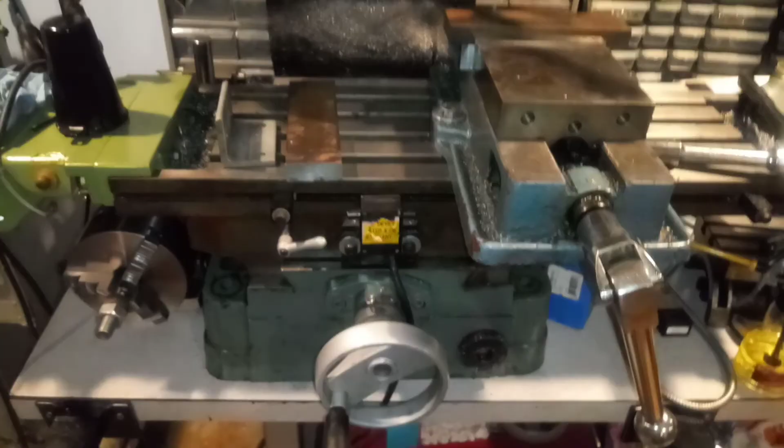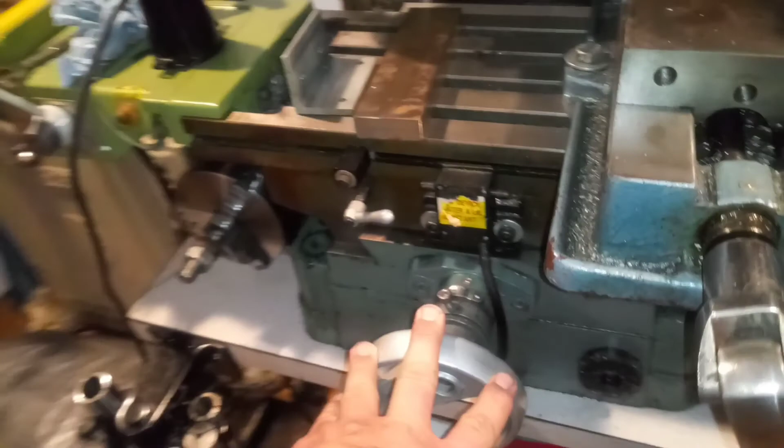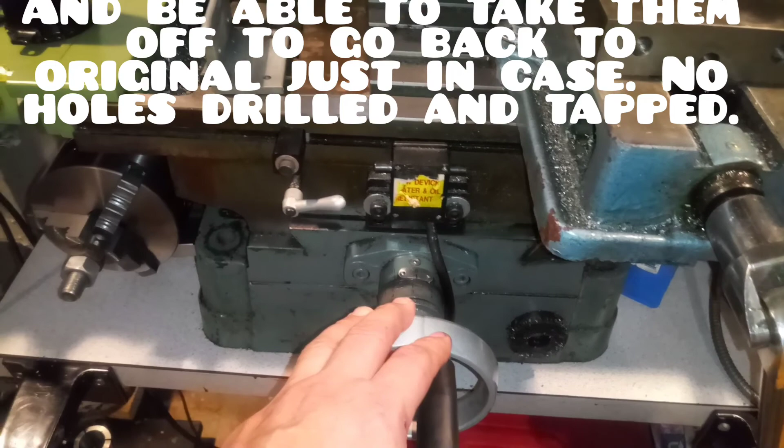So I made an executive decision, and I didn't do it lightly. I am going to put CNC motors or stepper motors on my manual mill. Now, I'm also going to do it so I can keep it manual. So the stepper motors will drive it when I want to use them, and if I don't, I can still use the mill as is.

It's possible, I've seen other people do it. And I'm not looking so much for an actual super high precision CNC machine. What I'm looking for is automation.

Again, I know in one of my other videos I was talking about my up-and-coming CNC mill project, and that will be a bona fide high precision, hopefully 4-axis CNC milling machine.

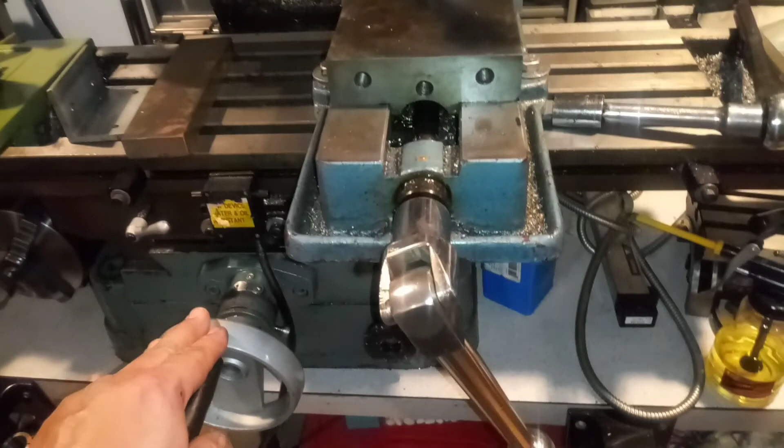But the steppers for this are basically just going to be for facing and, let's say, semi-precision stuff. Like if I want to put holes in a plate, rather than use my DRO, because what I think I might actually do is move the DRO I have over to my lathe, because I'd like to have a DRO on my manual lathe. I don't have one right now, and after pricing them out I realized how ridiculously expensive they are. So anyway, stay tuned.

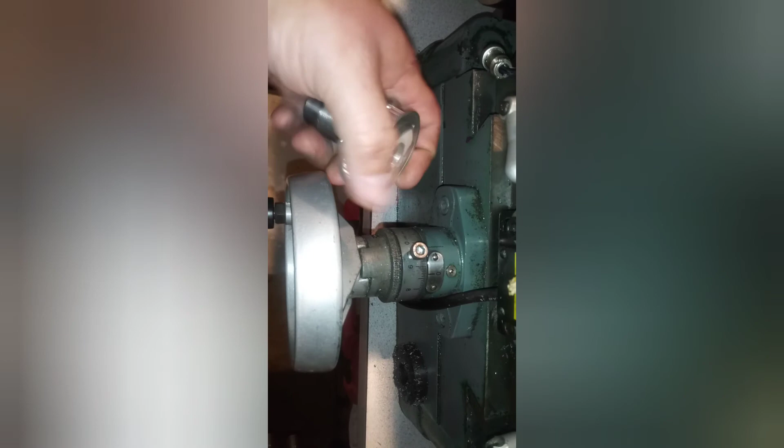So the plan at the moment is going to be replace this part right here. As you could tell, this and this are separate, and this are separate. This handle over here is off of this side, I'm guessing. I mean, this is how I got this machine.

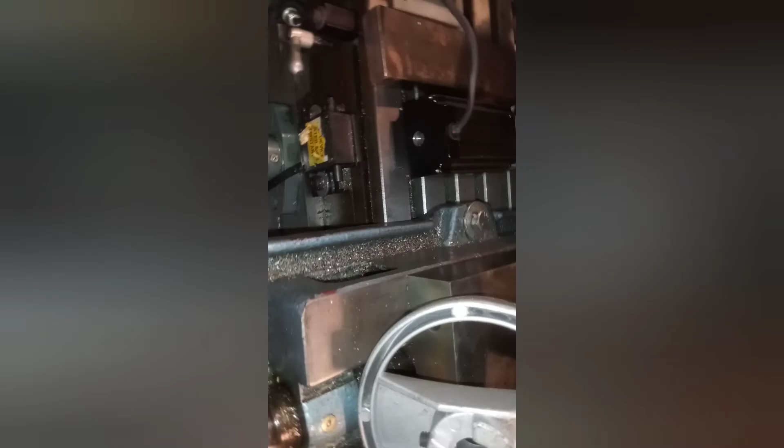When you put this on, so what I'm gonna do is ignore this piece here, this is another one of my failed projects. What I'm gonna do is make this shape here into the back of a pulley, so I can have the stepper motor over here or over here, wherever, and it'll be belt driven.

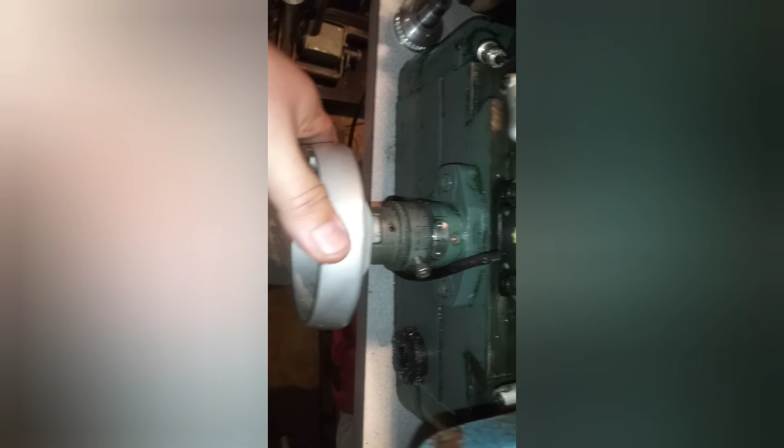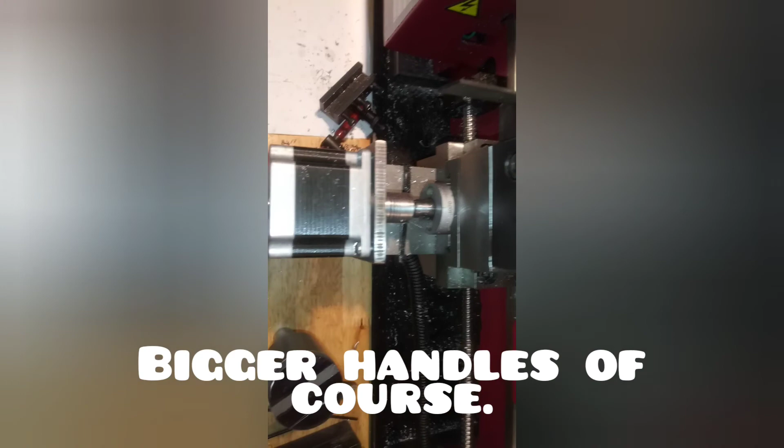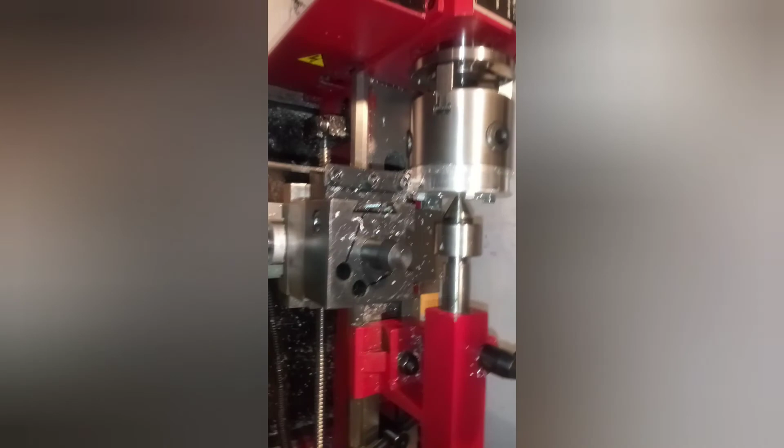Like I said, I don't know if I want to do direct drive. I could use the double-ended stepper motor like I have on my lathe. Hang on, I'll show you. Basically, this is what I got on my lathe. It enables you to use it as a manual machine as well. I have it on both X and Z axes, so I don't have to have the computer attached if I just want to throw something in real quick and turn it.

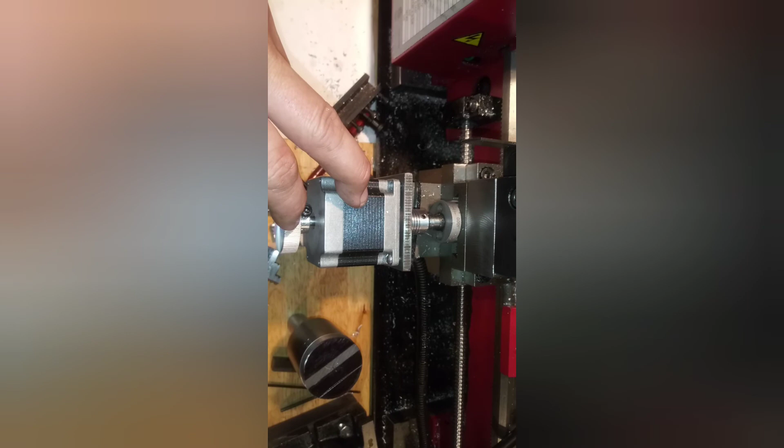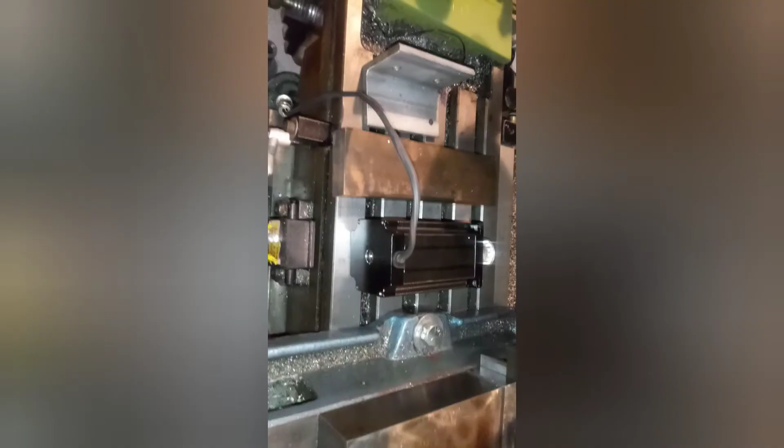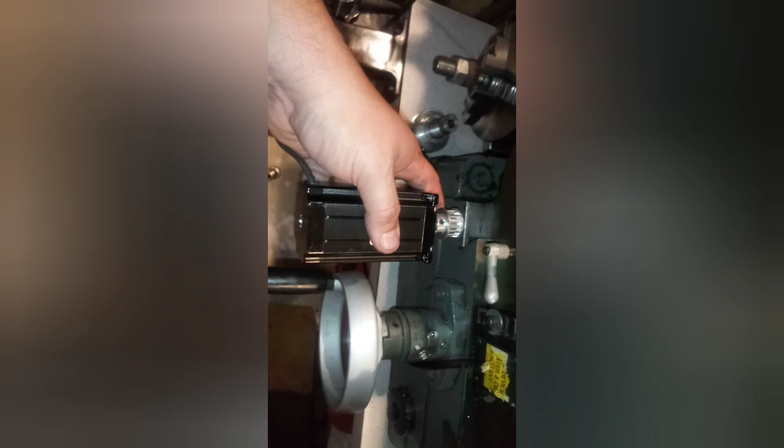So I could go direct drive, but my concern is the stick out of the motor. This is a NEMA 23, it has way more than enough torque for this lathe. But I don't know if this would be big enough for my mill. Probably looking at something like this. This is a 425 ounce of torque NEMA 23 stepper.

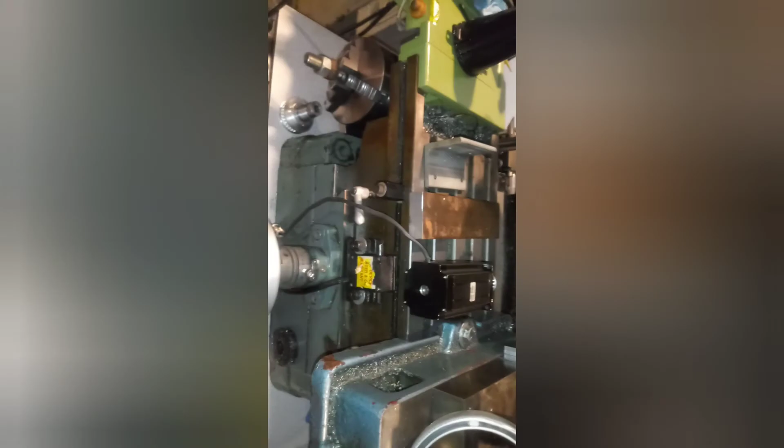Now this does not have the double output, so I don't have any that are this size, so I would have to buy 2 new steppers. But my concern is if I mount this, here, this is sticking out pretty far. I mean, I'll essentially be out here making my adjustments, and over here be the same thing.

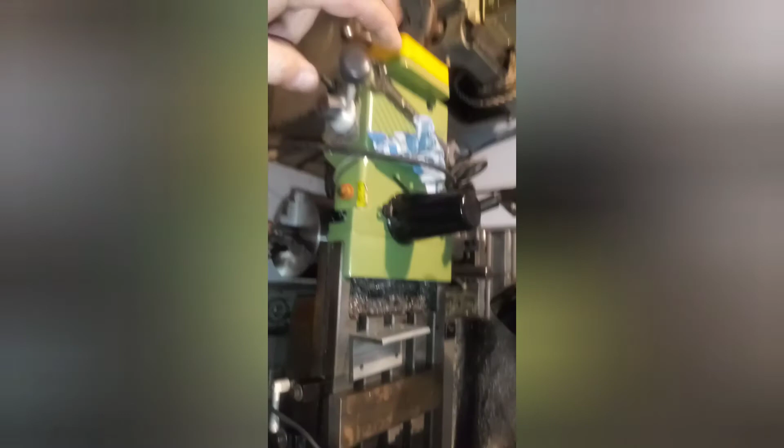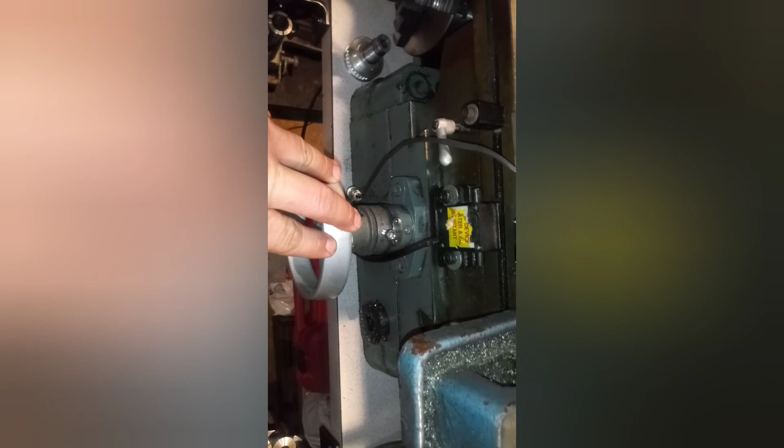Not that I do it that often anyway, because I'm usually using the power feed. But that's why I think I'm going to do belt drive instead. It's not going to be as accurate, but like I said, I'm not going for super accurate. I mean, I want it as accurate as possible, don't get me wrong, I mean, of course. But I might have to sacrifice a little accuracy for feasibility.

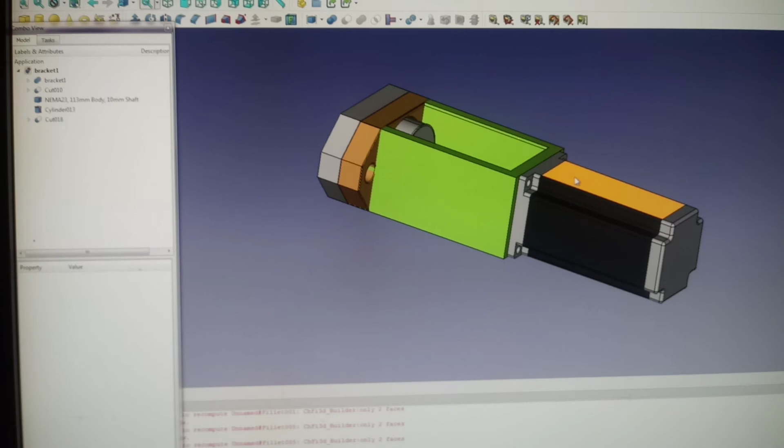Alright, let me show you what I got. This is the mount that I'm considering making. I'm still in the midst of modifying and, you know, fine-tuning, but this is the mount.

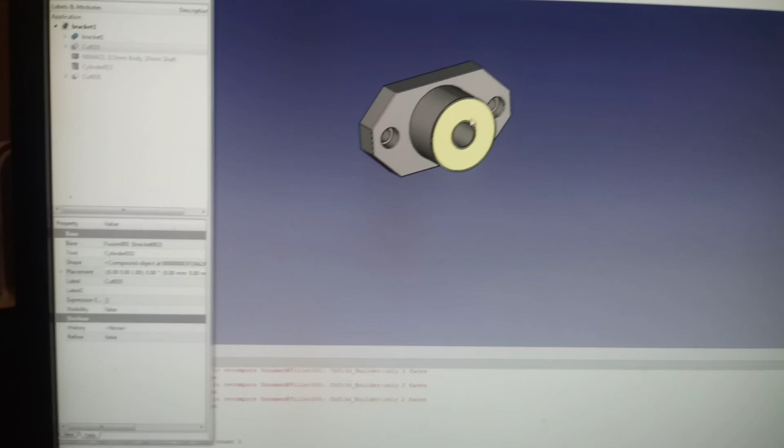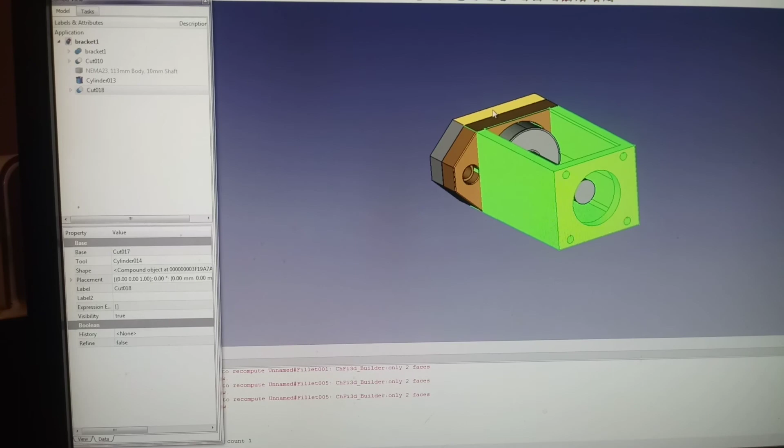Basically, if you get rid of this, get rid of the stepper, get rid of the shaft, and what you have here is the part of the machine that's coming out, you know, with the shaft. Now, if you add my two pieces, which will be one piece, get rid of the machine part, this is essentially what my part will look like.

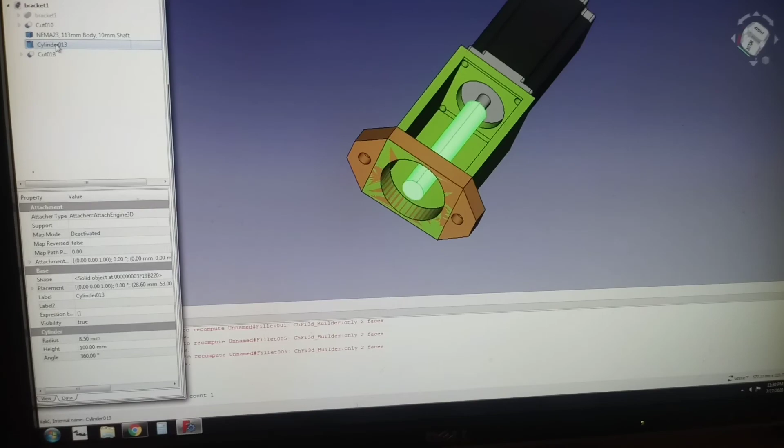Stepper motor will go on the back side, shaft will go, there will be a coupling connecting these two. I left the top open so I can get to the coupling and the shaft. And again, this is the machine.

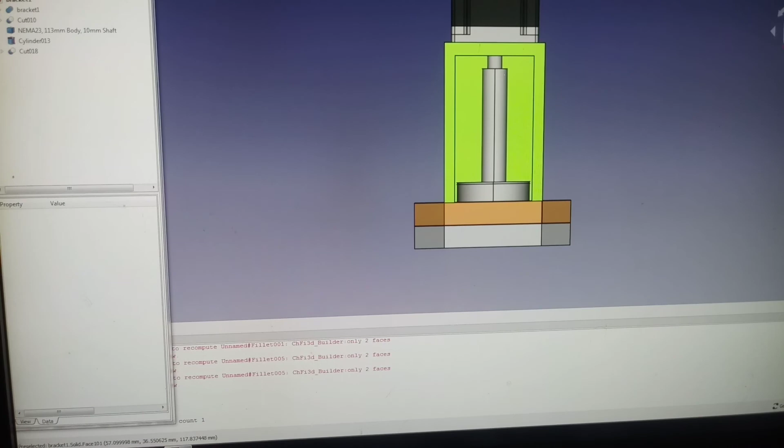I think I'm really close to this, and I think I'm going to 3D print this and see how it does. Then from there I'll know if I should fabricate it out of steel or aluminum, whichever way I go. Anyway, we'll see what happens.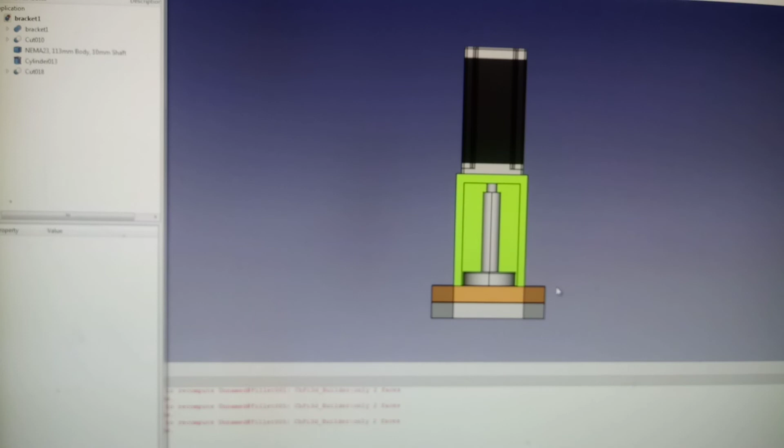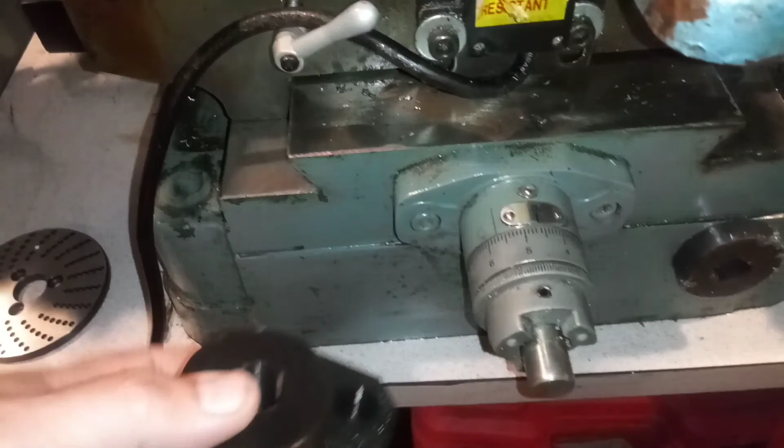Alright, I 3D printed this part here. I made it in CAD. I mean, it's not identical, but it's pretty darn close. I did that because I want to be able to make the stepper motor mount without taking everything apart, because this project is going to take a little bit of time. So I don't want my mill to go down for a couple of weeks. So yeah, that's what I did anyway.

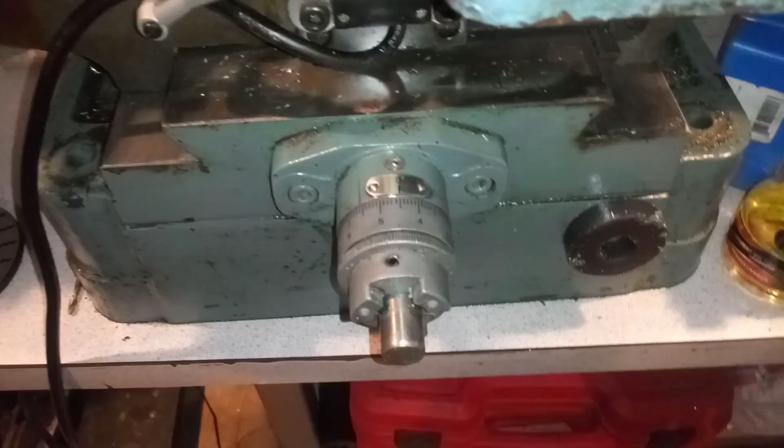You've seen the pictures of the mount that I'm making for the motor. Again, it's just a prototype, but I don't know what the final is going to be just yet. I'm guessing it's going to be some kind of a U-bracket type of thing. I mean, heck, who knows? Maybe even U-channel itself could work. We'll see. But, alright, we'll be back.

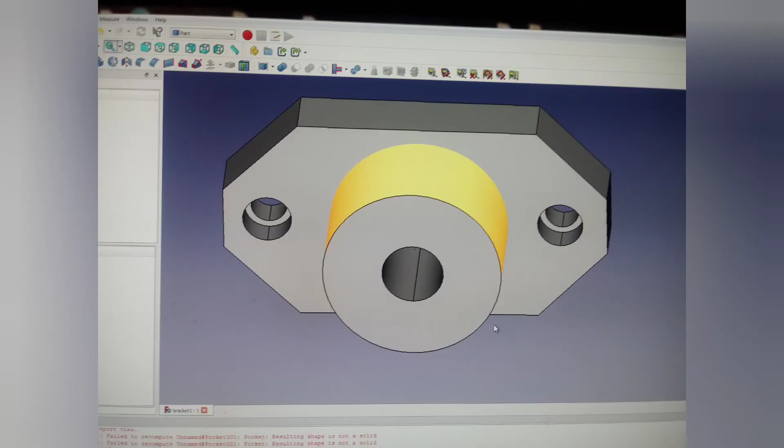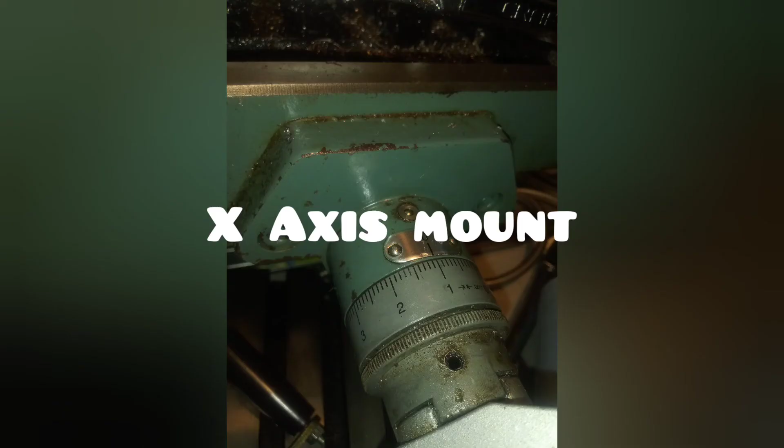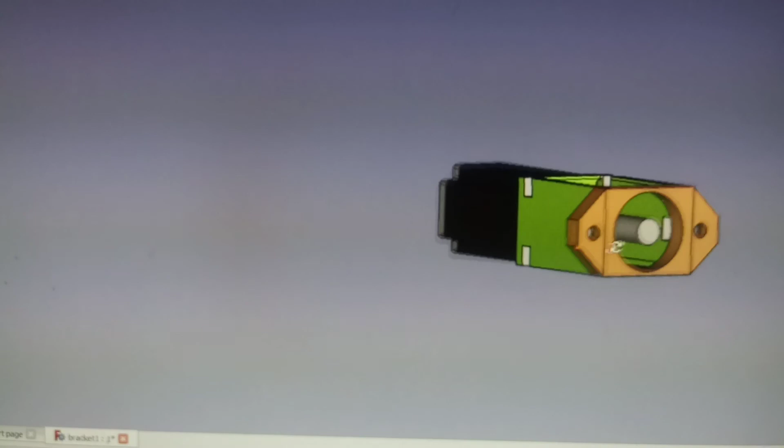I think this is the final revision. See the coupling. This is the shaft that connects to the machine, and then my stepper motor. I open these up for the hardware. I don't think it'll be a problem here since these are cap screws, but I did it here too just in case.

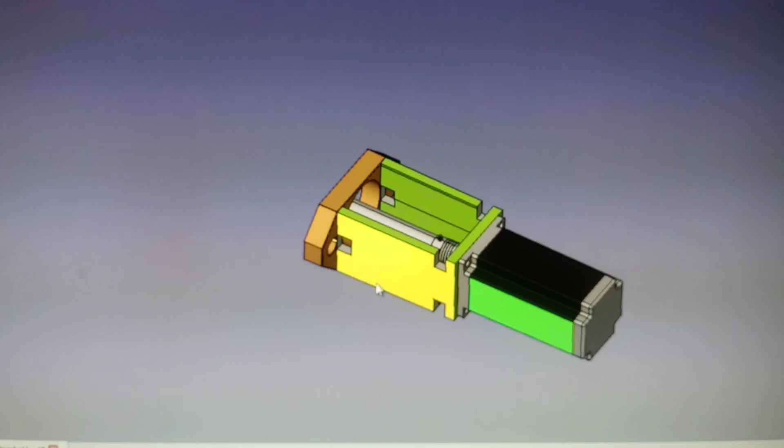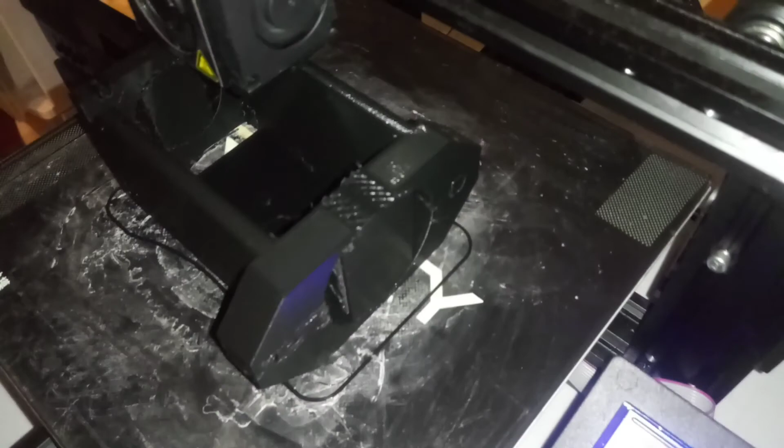27 hours into this. Unfortunately, we got a little bit of stringiness, but this is 100% infill - I built it for rigidity. This stuff here is all going to be knocked out. Almost done.

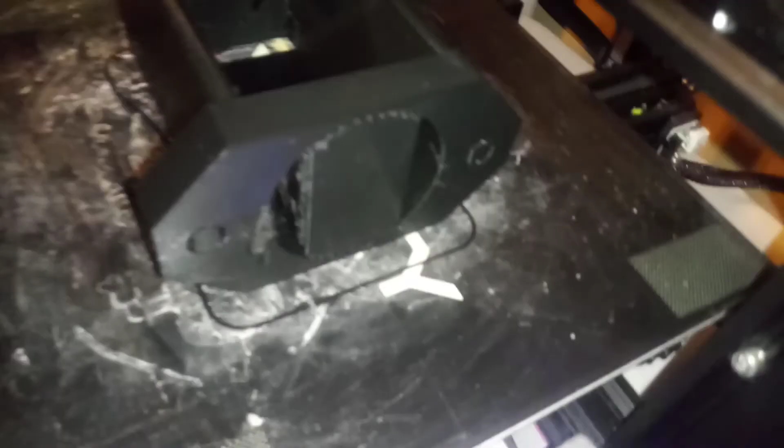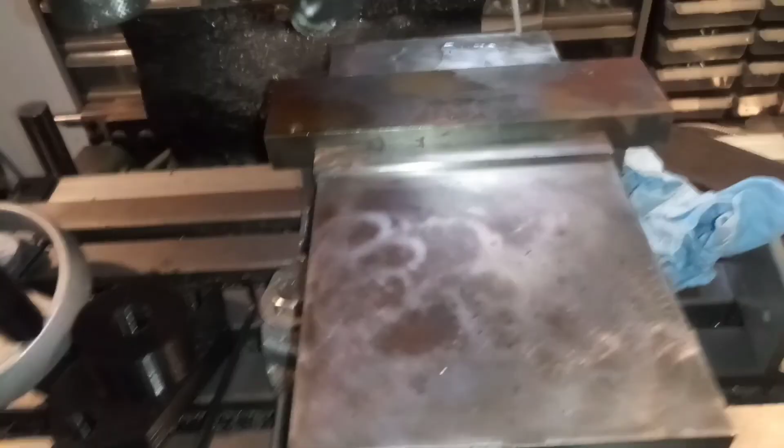Alright, let me show you where I'm at. I made this - this is basically a mimic of this. Now I made this. Try and do this the best I can with one hand - it will fit like this.

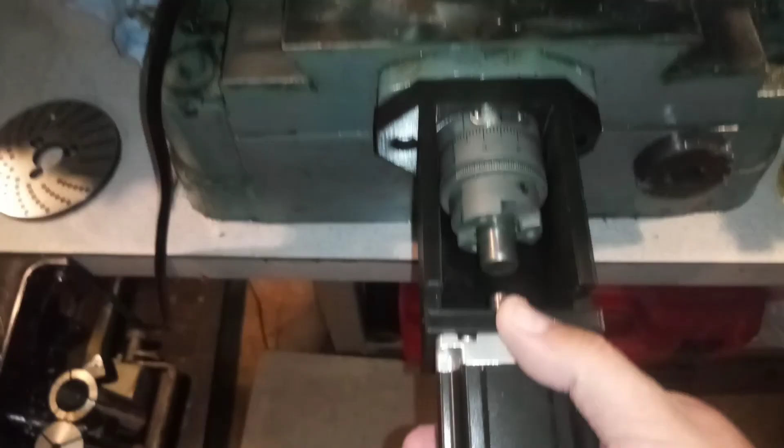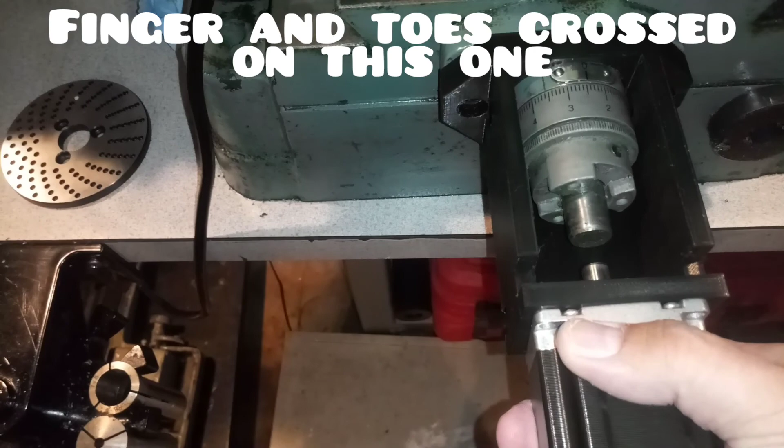So, exactly like that. And then, stepper motor back here. Now again, this is not the proper stepper motor, because the proper stepper motor will have a double-ended shaft for a handle, but this is the idea. Now I will bolt this up, and when I do so, if I did everything correctly, everything should be dead centered. It should be, again, there's a lot of ifs in there, but you know, this is the plan at the moment. Again, things can change. I don't know, we'll see.

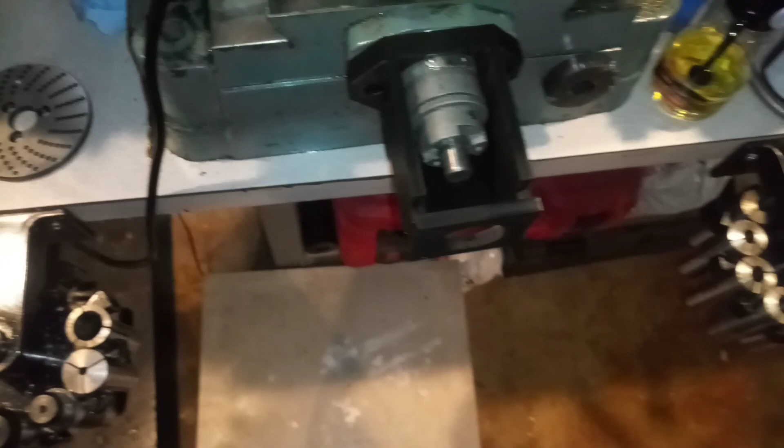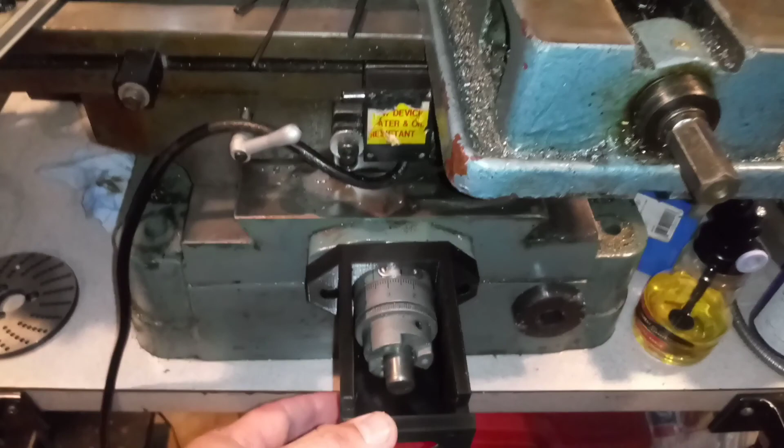The other idea was to do a belt drive, which I don't want to if I don't have to, but if I do, I will. I might not even need this big of a motor. After turning these handles, they actually turn pretty easy - I mean, I could do it with one finger. So I might be able to get away with a smaller NEMA motor, which means I could use the ones like my lathe has, which would really stick out a lot less and, you know, make me feel a little warmer and fuzzier.

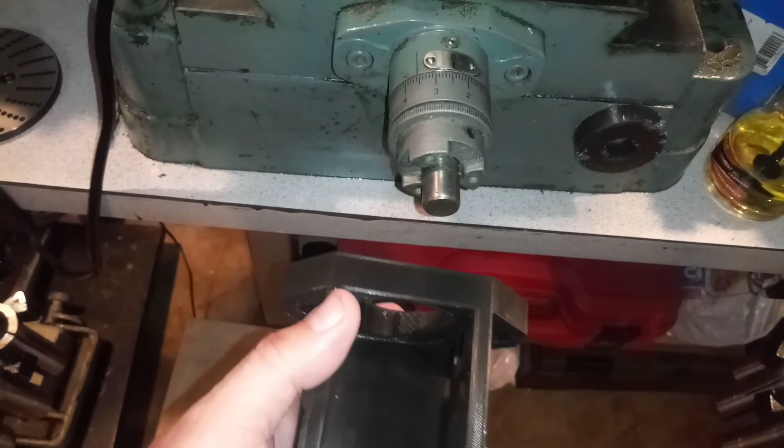So the only problem now that I can foresee is going to be the coupling, which is going to tie the stepper motor to the shaft. The reason it's a problem is because this shaft is 17 millimeter and this is 10 millimeter. All of the couplings I have are nowhere near that size. In fact, I don't even know if I could get a coupling like I have in that size. I might have to change the design to one of those Lovejoy or whatever they're called connectors.

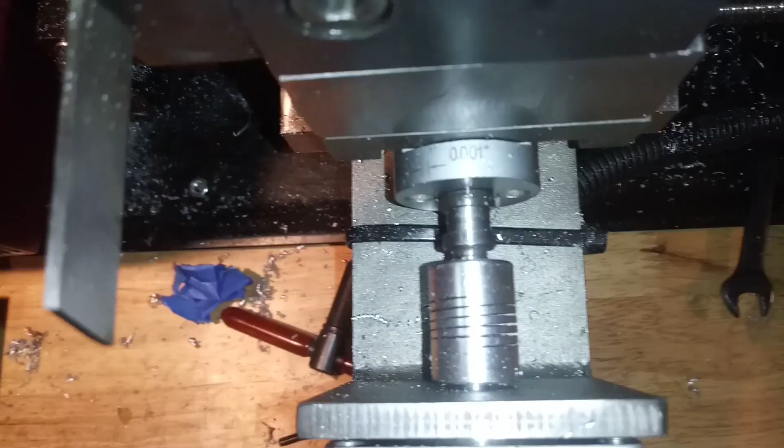I'll show you the other connector I'm talking about. I think I've already done this, but this is the connector here. Basically, you see those slots in there - it's designed for a little wiggle room, so if it's not completely centered, it stays rigid, but yet it allows you some flexibility.

I'm not sure if I have a Lovejoy around here. Let me take a peek. I've got one somewhere, but it's escaping me at the moment. If I find it, I'll put it on. Anyway, let's start getting this bad boy together.